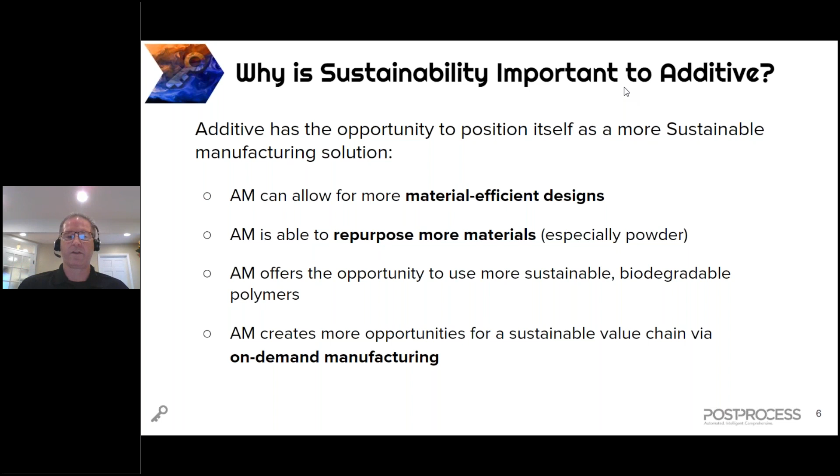When we talk about sustainability and post-printing, one of the areas we've discussed all week in our Unlock events is that we have an automated intelligent solution that allows us to connect this digital thread all the way from design through print through post-print. When you think about that, you can design sustainability into that process by thinking about how you're going to print your parts.

As an example, if you want a particular finish, you can design your part - the speed of your part - knowing you can use a post-print solution to achieve a certain finish, as well as how you think about material and support structures for overhangs. Your designs can either increase or decrease the amount of waste that comes out of your operation.

On Monday, we actually did a webinar on this topic, talking about polymer support removal and how to design your additive manufacturing part for post-printing success. If this is an area of interest - how to design parts for sustainability and post-printing sustainability - please take a look at that webinar, which can be downloaded from our website.

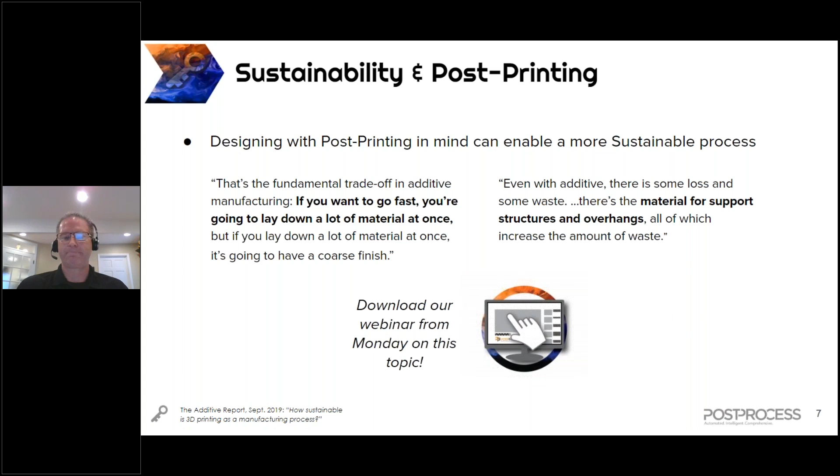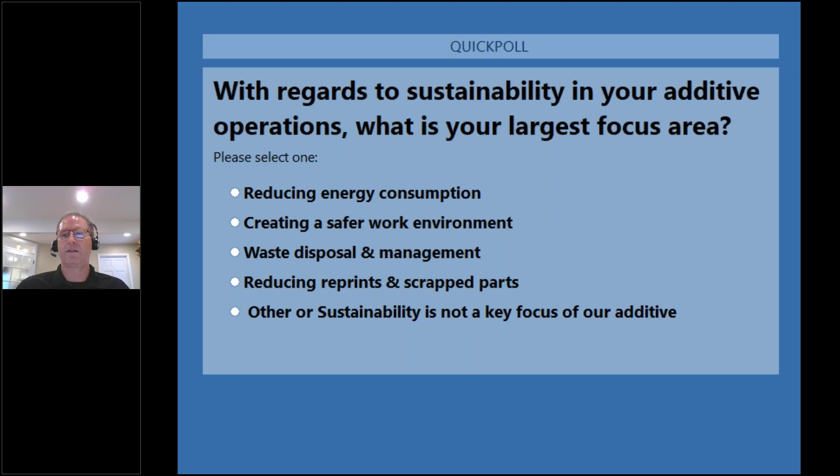Now shifting to thinking about sustainability in your additive operations - what's your largest focus area? Is it one, reducing energy consumption, which it sounded like was the top answer from a company standpoint? Is it two, creating a safer work environment for your employees? Is it three, focusing on waste disposal and management? Fourth, reducing reprints and scrapped parts? Or is sustainability not really a big focus of your additive operations? Take a minute, think about your internal additive operations, click the one that's mostly your focus today, and hopefully we'll be able to talk about some solutions post-process has that can address some of those focus areas. We'll give it a minute, and then Diana will jump back in with the results.

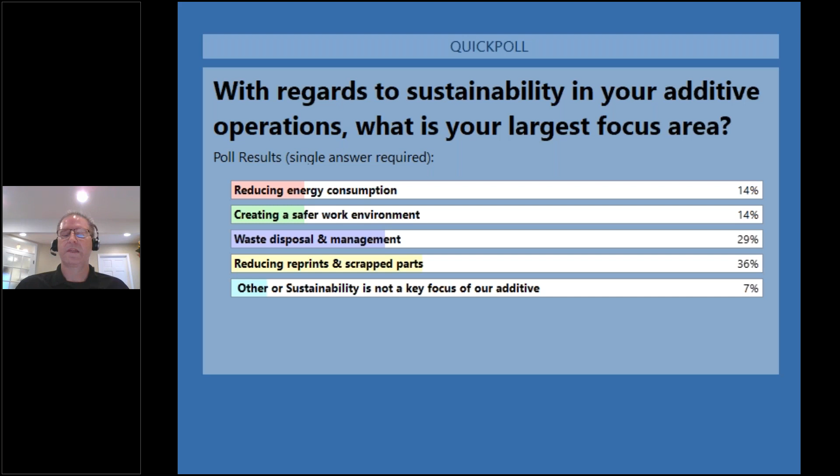It looks like the winner here is reducing reprints and scrapped parts at 36%, followed closely by waste disposal and management at 29%. Interesting. Yeah, those are great lead-ins as we talk about how our solutions are going to solve for some of those sustainability focus areas.

I'd like to spend the next 10 minutes or so, and then we'll open it up for questions, talking about our solutions in this space. We're going to talk about three different solutions and the impact our solutions can have on the potential sustainability of your operation.

The first area we want to concentrate on is resin removal - for SLA, DLP, CLIP - and the sustainability considerations around that. Today's resin removal process, if you're familiar with it, involves a lot of traditional manufacturing tanks with traditional solvents like IPA. Very often there's a lot of manual labor with brushes or squeeze bottles in order to remove the resin. So this is the traditional way people are removing excess resin from their parts today.

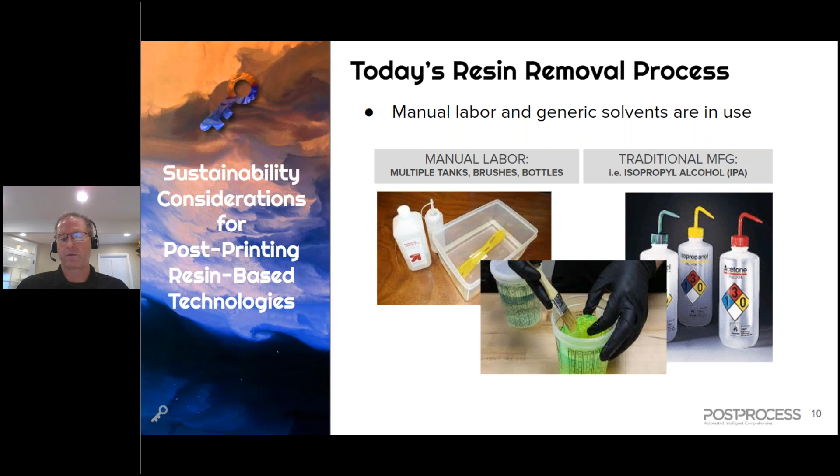We've developed a more sustainable, environmentally friendly, and automated process for resin removal. I'm not going to go into the solution a lot today. You can learn more by reaching out to us or going to our website to learn about our specific resin removal solution.

I want to talk about it in terms of sustainability. One piece is if you can clean more parts or have greater longevity of the solvent you're using, that has significant advantages from a sustainability standpoint. Our post-process solution using our detergent can clean 5 times as many parts. We've tested it in the field, cleaning over 1,000 trays, probably closer to 2,000 now, well over 20,000 plus parts before reaching saturation.

So what does that greater longevity mean to you as a producer of parts using resin? It means less downtime. You're spending less time switching out detergent. You also have lower risk of accidents during those chemistry changes. The less you're handling chemistry, the better off you are.

One of the biggest outcomes is that because we can clean 5 times as many parts, you have 1/5 the amount of waste. On the right-hand side of this slide, you can see that for every 1 barrel of waste produced by the post-process process, you can produce up to 5 barrels of waste from IPA. So a dramatic reduction in the amount of waste.

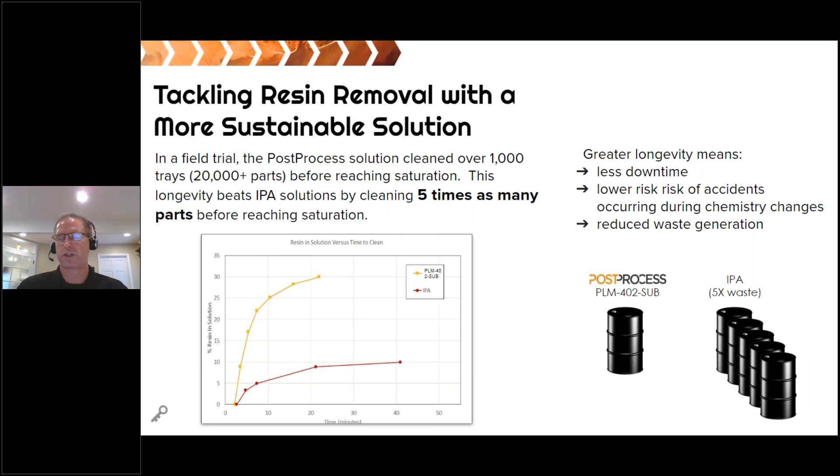There are really 3 different areas where the post-process solution provides a more sustainable solution for resin removal. One is reduced chemical handling, 5 times less handling, which reduces spillage and requires less equipment.

One of the things a lot of people are focused on is energy and the amount of floor space required for your operation. This solution fits into a smaller floor space, requires less chemical storage, and generates significantly less waste, as I talked about on the last slide.

Another thing that's starting to get talked about a lot is a safer work environment. Because of the higher flash point of our solution, much higher than IPA, we don't require ATEX certification in Europe or an explosion-proof environment or equipment like we talk about in the US. So there's less exposure to toxic and flammable vapors like IPA.

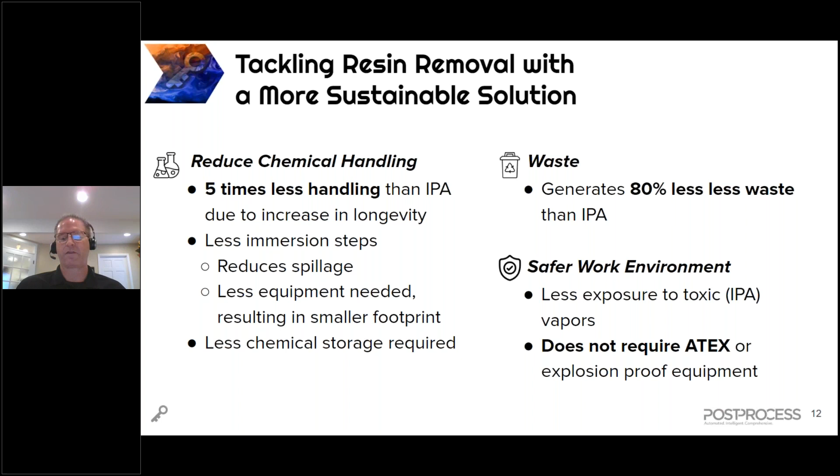The second solution I want to talk about is FDM and how sustainability fits into FDM support removal. Traditional manufacturing uses submersible tanks and a lot of manual labor in addition to those tanks. It takes so long in a submersible tank that often people want to remove as much of the support material as they can before putting it in, to allow the solution to work as efficiently as possible.

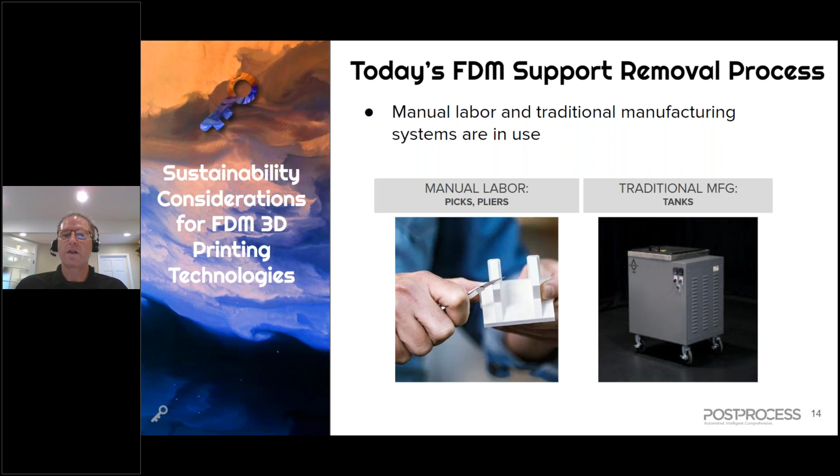The solution PostProcess offers, which we're talking about today, is our VVD solution. Because it's software controlled, it not only significantly reduces the attended technician time, the amount of time a technician has to spend checking parts and making sure they're clean, it also dramatically reduces the overall cycle time.

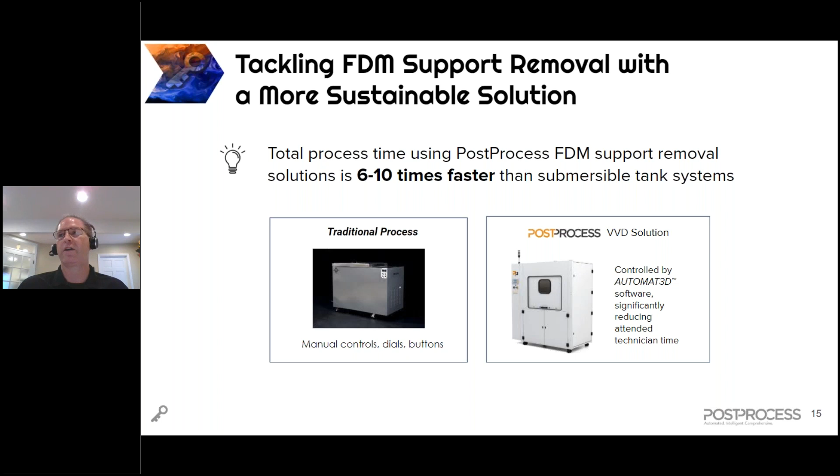In our comparison tests, our FDM support removal solution is 6 to 10 times faster than a traditional submersible tank. So with the focus many of you have on energy and the ability to increase throughput, this could have a significant impact.

How does that translate into sustainability? Because you can use a smaller footprint to get the same throughput, and it has a much faster cycle time, it actually uses 2 to 4 times less energy than a traditional tank solution. The high efficiency of our solution can double the batch capacity of a common wash tank.

So if one of the issues you're having is that throughput issue, our solution provides a much better option to increase that throughput.

Interestingly, many people's focus area within additive, as Diana mentioned, is people reprinting parts. In FDM, some customers see an issue with warpage due to things sitting in a tank for long periods at high temperatures. Because our solution exposes parts much less, there's less waste from reprinting and less damage to the parts.

And because there's less manual labor involved in removing supports, you can also look at the sustainability for a worker and the lower workplace issues due to repetitive injuries, which is a significant area companies are looking to reduce.

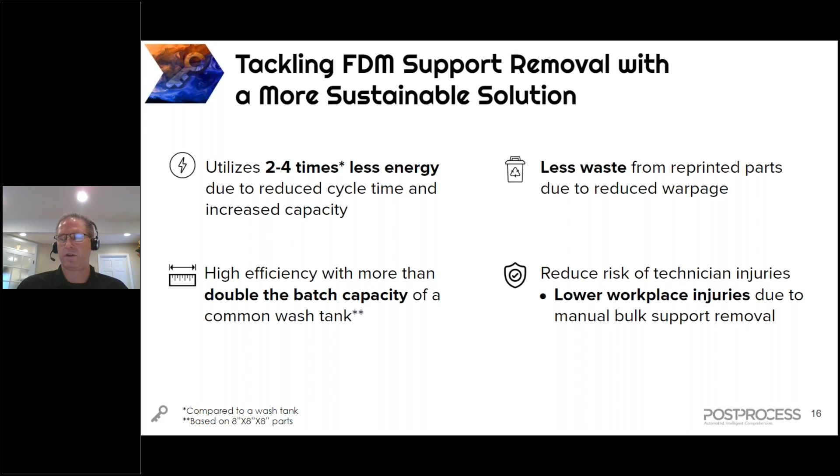We'll talk a little bit more about that when we move to the next solution, which is PolyJet. So the last area I want to concentrate on is PolyJet and how our solution provides a more sustainable solution for PolyJet support removal. Again, not surprising for those of you doing PolyJet support removal.

The traditional way is using some tanks to maybe loosen up some of the support, using a water blaster. You see the picture on the bottom of this slide. And often it's using a lot of manual picks and brushes along with that water blaster to make sure that you truly remove all of the PolyJet support.

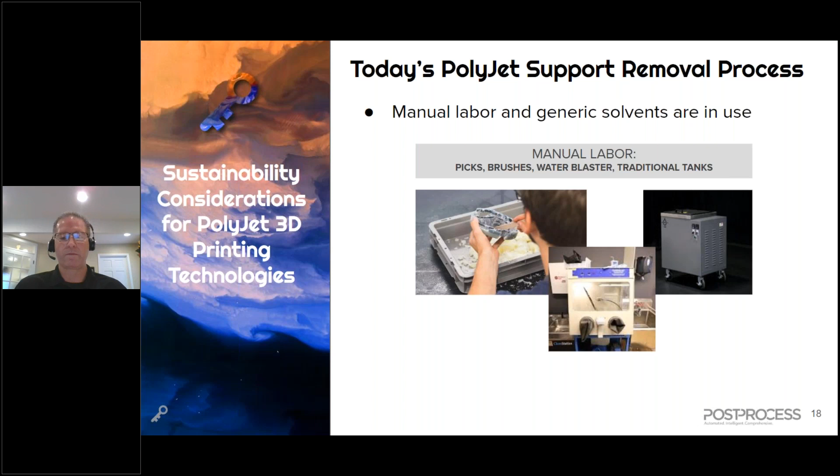Our solution is controlled by our AUTOMAT3D software. It's an automated, intelligent solution compared to the traditional water blaster. In that comparison, we've seen throughput increases of more than 30% and reduced attended technician time by over 80% when compared to manual water blasting.

So you might say, why is that important? If any of you have done, and I know Diana has done this personally, stuck your hands in one of those glove ports and held the parts while blasting off the PolyJet support material, that repetitive nature, let alone it's not really that easy to hold onto some of the parts as they get slippery and move around. From a sustainability standpoint, the idea that you're for 6, 8, 10 hours a day reaching in and holding parts and spraying them off is definitely a repetitive concern for many customers.

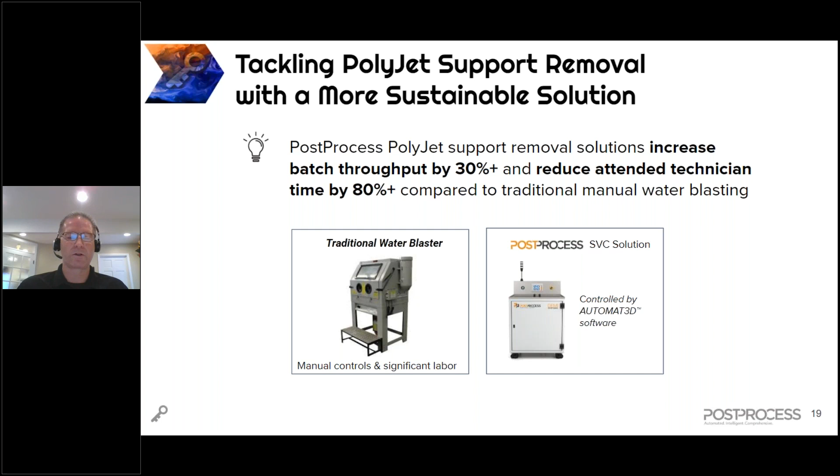So the two areas for PolyJet support removal where our solution is more sustainable: the first is on reducing reprints, which many of you said is a big challenge.

Often when you're using a water jet or picks or tools, you might damage, especially in PolyJet, medical materials, like heart models and medical models and things like that. Trying to clean those is often difficult, and we've heard of people having to reprint or print multiple to start with because they know there's going to be a certain amount of damage.

The second piece is reducing repetitive injuries. I've put a couple statistics in here: 2/3 of all occupational injuries reported are mainly due to upper body parts, such as the wrist, shoulder, and elbow, these repetitive injuries. In general, across all markets, not specific to additive, those kinds of repetitive motion injuries cost employers an estimated $80 billion a year. So it's definitely an area many people want to focus on, to create the best environment for their employees, the least risky and most sustainable environment for their employees.

So that's just a quick overview of 3 of our solutions and how they have a positive impact on sustainability. Please reach out to us if you have more interest in either resin removal, FDM support removal, or PolyJet support removal. That also is, as Diana said, going to be covered in the LSEs we have the rest of today, and you can schedule an individual solution experience time or tour with us if that doesn't work out for you today.

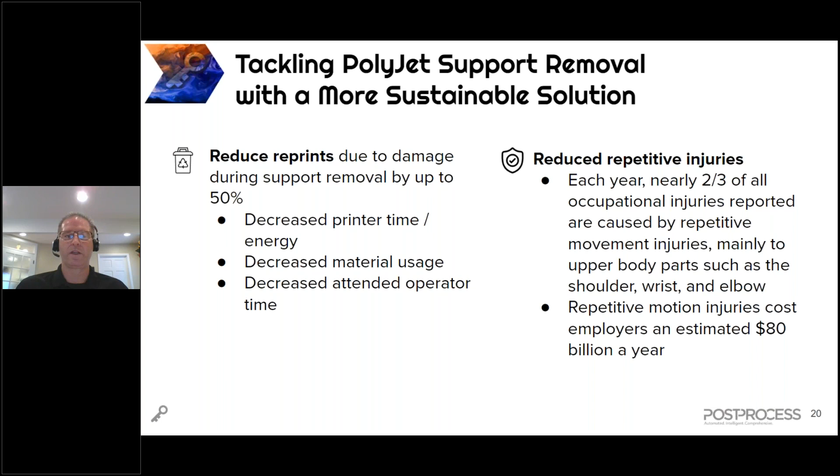So in summary, why is sustainability a focus, or why should it be? Well, companies are starting to think about, and some are being very progressive in thinking about, all 3 of these pillars: profits, planet, and people, is the way that I like to think about it.

We believe, and many people in additive believe, that we have an opportunity to positively influence this sustainability. PostProcess is committed to sustainability, not only within our company and labs and when we deal with our employees, but also in the solutions we provide. Hopefully you got a brief flavor, in the short time we have together, of the types of things we can do with our solutions to increase sustainability in additive.